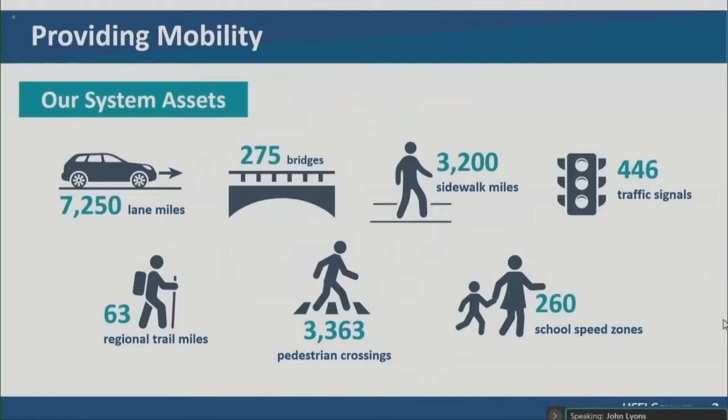The Public Works core service and mission is to provide a safe and reliable transportation system for pedestrians, bicyclists, transit, and vehicles. We operate this system 24/7. It supports not only the traveling public, but also responsive fire rescue and law enforcement for different reasons as well.

As Bonnie spoke to, in the next workshop we're going to speak to building and improving the system, which is the third component, the three-legged stool in our capital program. In preserving the system, we have a lot of assets, and it takes considerable effort and concentrated planning to execute and preserve the system. Today we're going to focus on that, and talk about the condition of our system as it is today and what could happen over the next 10 years with different investment options.

Asset preservation is the planned, scheduled maintenance of various parts of our network. This includes routine detailed inspection and condition assessment. This information is analyzed to develop a metric-based recommendation for repair and replacement.

Pavement is inspected on a 3-year cycle. The bridges are on a 2-year cycle, and sidewalks are inspected in response to citizen calls. The traffic signals are inspected by our operations people because they're routinely doing maintenance to ensure that they operate and function properly.

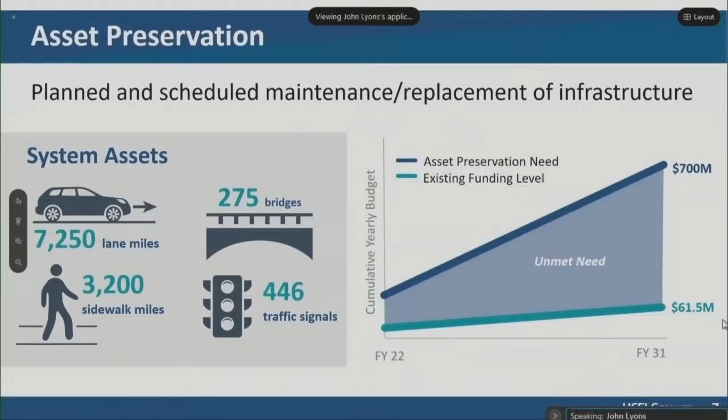Almost all the roads in the county are constructed of asphalt pavement, and they're categorized by major roads and local roads. These are some of the characteristics of each. Major roads are often multi-lane roads with multimodal connections, bus stops, and sidewalks. There's higher volumes on these roads, heavier types of traffic like trucks and buses, and many of the intersections are controlled by signals.

On the local roadways, those are typically 2-lane roads. They could be rural or neighborhood roads, with lower volumes and typically less heavy traffic, and they're typically stop-controlled through stop signs.

Each of the road segments are broken into segments, and we have about 27,000 segments that are inspected through that 3-year cycle. During that, the team measures things such as surface wear, rutting, and signs of distress such as cracking, patches, and potholes. That information is all plugged into a computer model that results in an overall pavement condition index.

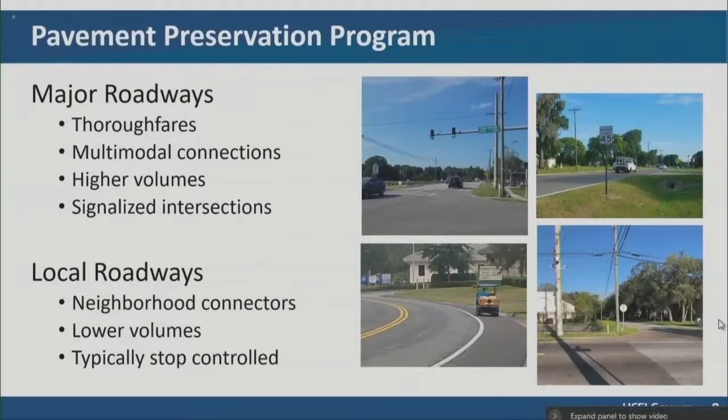About 2/3 of the roads are local roads, at 4,680 lane miles, and about 1/3 are major roads. The difference between a center line mile and a lane mile is we've broken it down into each travel lane. So as an example, a 4-lane road that's 1 mile long would have 4 lane miles.

We're setting targets of at least 50% of the roads should be in good condition, with less than 30% of the roads in poor condition. We'd like to get to a place where we have no roads in a failed condition. These outcomes will result in preserving the roadway assets, extending the useful life, and also improving the safety of the road.

The curve on the right is representative of a single segment of the road, and shows what happens to the roadway over time. Initially, when it's resurfaced or originally built, it stays in pretty good condition for a while. Then it starts to see the wear and tear of vehicles, the environment, and other factors. It goes into a fair to satisfactory category, but the slope starts to increase, meaning it's deteriorating faster. Then we get to poor to very poor, and then serious to failed. When it gets to serious to failed, major reconstruction typically takes place.

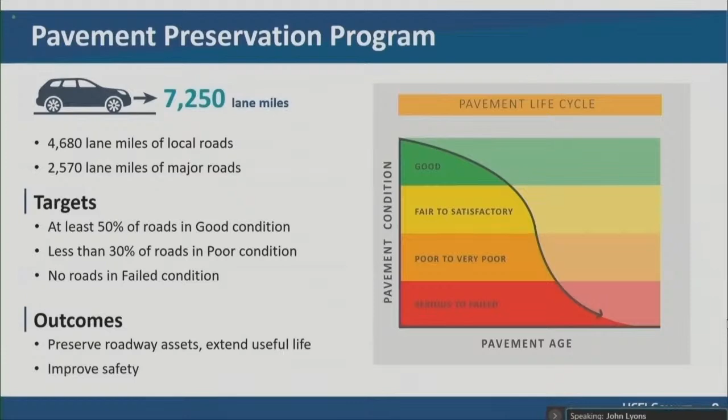These photos represent different conditions over time. The photo on the top left is a newly repaved road—the striping is fresh, everything looks good, and the asphalt is still dark. As you get to fair to satisfactory, the road has a few years on it, and the sunlight is starting to bleach some of the asphalt out of the roadway surface. You're starting to see wear of the surface, and the sand and gravel in there will start raveling away.

As you get to poor to very poor condition, you'll start to see cracks in the road. Those cracks are very important because they start to allow water to get into the base of the road, and that's when bad things start happening. So somewhere between fair and satisfactory, before we start seeing those cracks, is really when we want to provide that treatment to the road.

The photo on the right shows where the road has gone to serious to failed. The cracking has gone from linear type cracks to what we call alligator cracking. That's sometimes a reflection of the road base starting to fail where water has intruded upon it. It's also lost the structural integrity of the surface—the asphalt is flexing and starting to break down the structure underneath.

Through this inspection and analysis process, the appropriate treatment is selected to preserve and extend the useful life of the road.

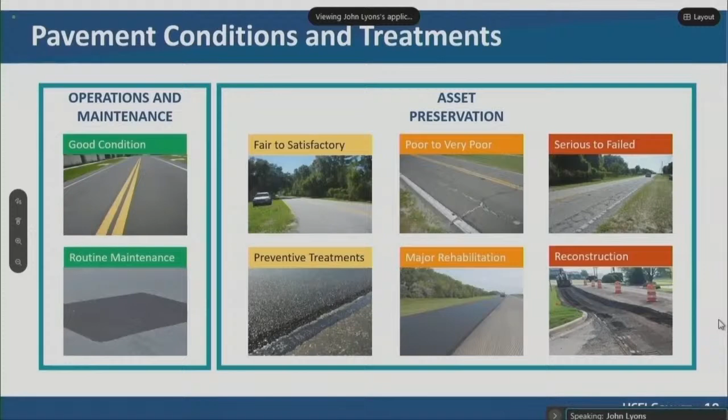Here's a recent example, just within the last couple of years, on Countryway Boulevard up in the northwest part of the county. It's 4.8 lane miles, just a little over 2.5 miles long. We ended up doing full depth reclamation, which is kind of a reconstruction treatment—the contractor brings in a mixer and mixes up the whole road base, recompacts it, typically adding asphalt or some other additive, then resurfaces over the top of it. The total cost of that project was about $1.8 million.

With the budget constraints we've had over the years due to the recession and other factors, we would have liked to have paved that road several years ago. If we had been able to do that, we could have milled the surface and overlaid it at about half the cost. So as you can see, the longer stuff goes, the further it deteriorates into that really bad condition, and the cost of fixing it goes up tremendously.

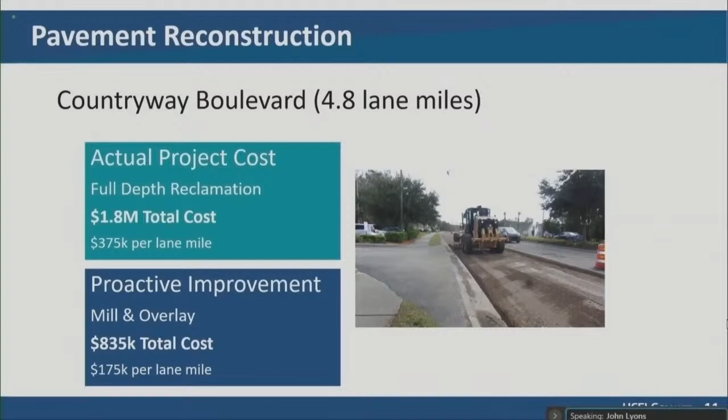We've seen a significant increase in the serious to failed roads, a very significant increase in the poor to very poor, and decreasing in the categories we desire to be in.

The ideal funding level is the catch-up proposal. To do that, we would spend about $25 million a year on local roads and be able to do about 240 lane miles per year. That brings a significant improvement into the system, to where 60% of the roadway is in good condition and only 24% would be in that poor to very poor. So we would really make a lot of progress on that as well.

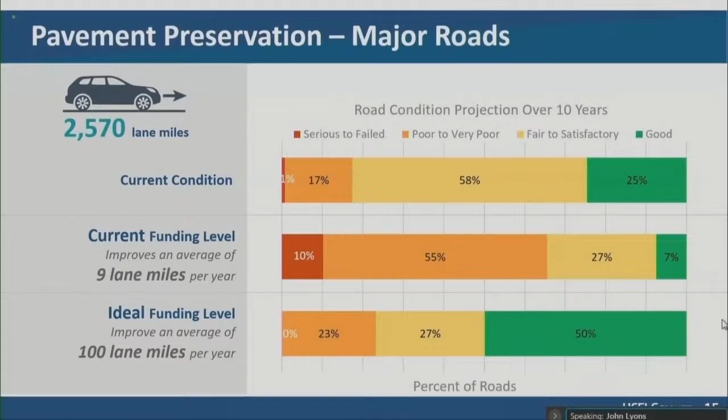So under the ideal level of funding at about $20 million a year, or $200 million over the 10-year period, these would be ideally what we'd be able to accomplish. With the current level of funding, significantly less effort would go into that.

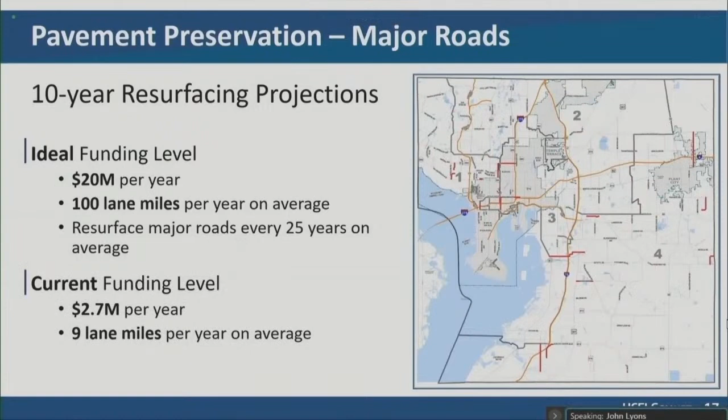The sidewalk repair program — we have 3,200 miles of sidewalk. What we really want to do is focus on improving the safety, health, and walkability of the community, and accessibility as well.

For about every mile of road, we have about 15% that has sidewalk issues, with either broken sidewalk or joints that have been offset and panels that need to be replaced. Typically these are isolated repairs of about 10 to 12 feet of sidewalk. With about 15% of that, there's about 60 to 70 locations per mile that need to be repaired. The good perspective is that if we fix that 15% of the sidewalk, it makes 100% of the sidewalk safe to traverse in that neighborhood.

We have about 2,400 open work requests right now actively waiting repairs, some dating back to 2011. We typically group those by neighborhood because it's more efficient. We don't want to do them individually from oldest to newest, because then we'd be moving all about the county to do that, and that's really inefficient — it would cost us a lot of money with the contractors to mobilize. So we typically look at the oldest request in a neighborhood, aggregate all the other requests, and that'll be the neighborhood that gets tackled first in those cases.

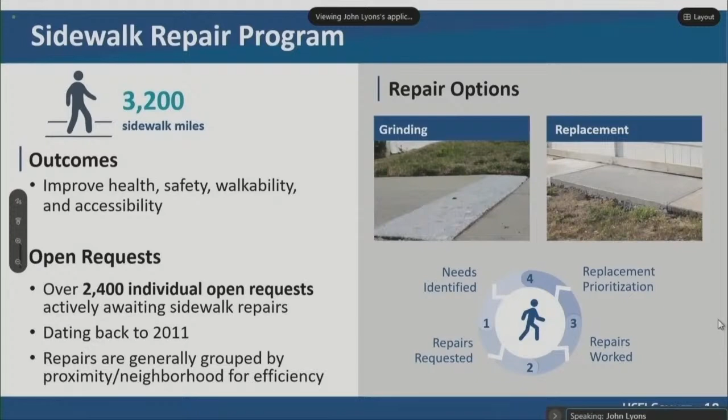Our 10-year sidewalk repair projection is that we would like to spend $10 million a year. We'd be able to knock out about 300 miles of estimated sidewalk replacement and take care of a lot of the neighborhoods around the county. At the current funding level, we're dropping back significantly and will be able to accomplish very little over the next 10 years.

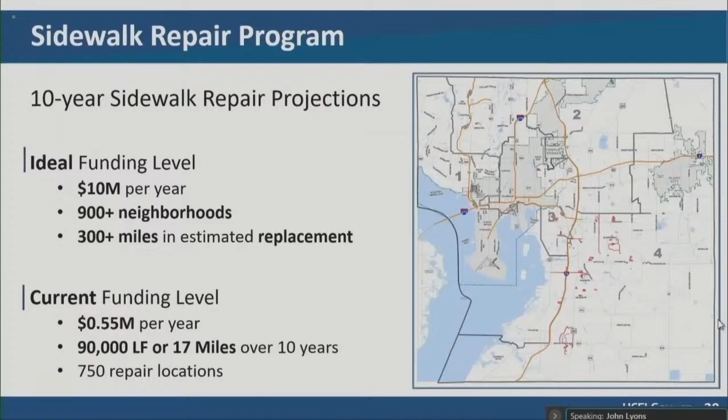The bridge program is another component of the system. We have 275 bridges in the system. 254 of those bridges are in the travel network for the roadways. The other 21 bridges are other types, potentially in parks, pedestrian bridges, the Upper Tampa Bay Trail, etc. We've consolidated and classified the bridges into essentially 4 types.

In the middle picture, the span bridge is typically a longer bridge. It has a piling foundation. It's over a waterway, typically a creek or a river or a bypass canal. It's a pretty substantial structure of longer length.

Another type of bridge that could be considered would be a culvert, a box culvert in this case. Under the National Bridge Inspection Program, anything over 20 feet in length, whether a combination of pipes or concrete boxes, or these spans, would be considered a system bridge that would be inspected. We have 75 of these culvert type crossings.

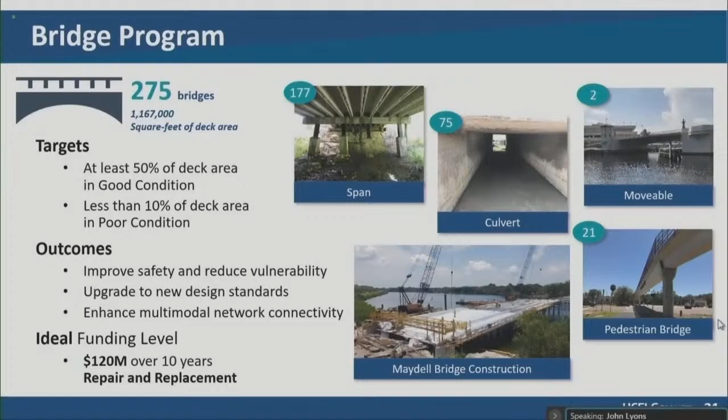The current condition of the system is actually in pretty decent shape. We've got 2% of the deck area in poor condition, which translates to more than one bridge—I'm not sure the exact number, but we can get that information.

At the current funding level, we'll see a significant increase of bridges moving from good to fair condition, and an increase in the level of poor bridges. At the ideal funding level, we'll have still less in good, but the entire system will either be in good or fair condition. One thing about bridges—we spoke of pavement life being 20 to 25 years, but typically these bridges are 50-plus year structures. So in this 10-year snapshot, we're expecting that in the next 10 years, years 11 through 20, we would probably need to invest more money in bridge replacements as those older structures need to be replaced.

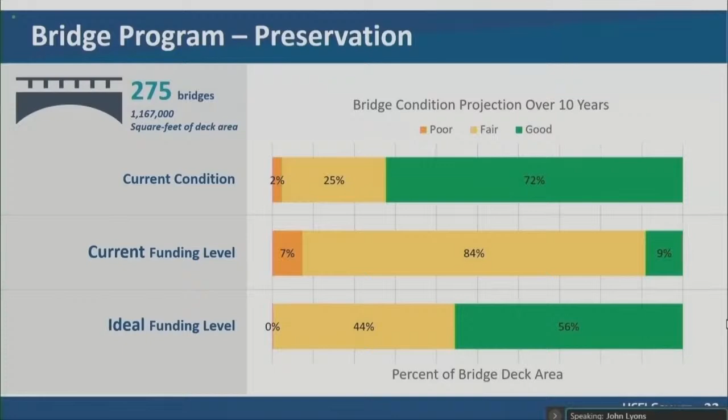Under the preservation portion of that $120 million, we would spend about $57 million over the next 10 years doing a lot of these type activities. The photo on the left shows the flow line of the bridge has been silted in. There's a possibility that with all that silting, the water flow goes elsewhere—it could be eroding the side banks or undermining the foundation in other areas. So we go in there and look for scour, which would undermine the foundation system of the bridge.

Go in and reinforce that, clean the sediment out, and do those types of activities. So there's a before and after picture there.

The cathodic pile jacket: this bridge was most likely in fresh, brackish, or salt water, and those piles are old. What happens is the water saturates the concrete and gets into the reinforcing steel. If it's salt water, it starts to erode the structural integrity of the bridge. So the fix in this case was to jacket the pile with additional concrete and reinforcing steel, and provide some cathodic protection against salt water. This extends the substructure of the bridge and lets it go for more years.

The picture on the right shows a wing wall, where it transitions from the roadway to the channel or water conveyance system, that was undermined and eroded. It has a tendency to separate and settle away from the bridge, which could cause other problems in the future. So those wing walls would be replaced.

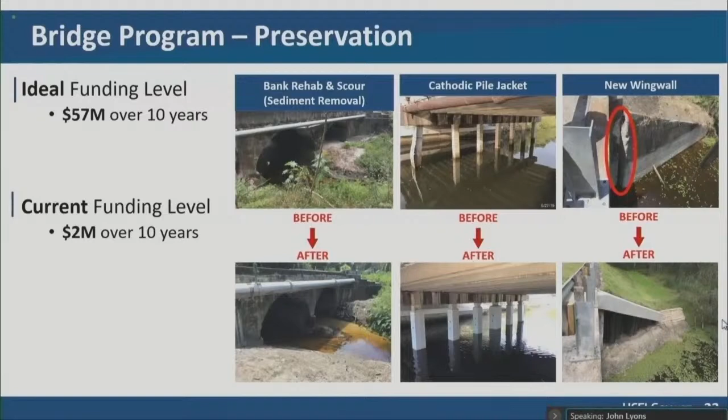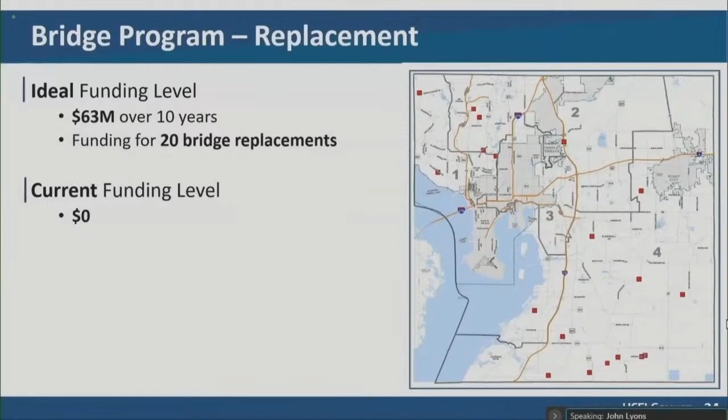Under replacements, we've identified about 20 bridges that need to be replaced over the next 10 years. At the ideal funding level, we would spend about 63 out of the 120 million on those replacements. At the current funding level, we wouldn't be able to do any of those bridge replacements.

For traffic signals and intersections, we're going to start a program that didn't exist before. We've done it on an occasional basis, but we need to start going in and methodically replacing signal poles in a lot of the intersections in the county. We have a goal, or target, of doing about 5 intersections per year.

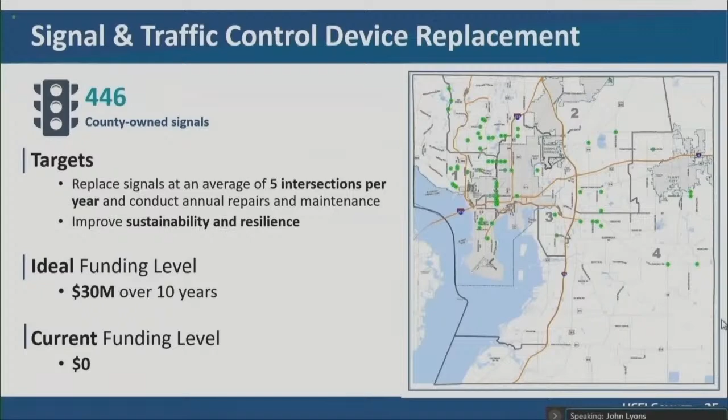The reason behind that is many of those poles are old. They were designed under different wind loading standards for hurricanes. Some of the structures, either the metal in the pole and mast arm is starting to crack, or the concrete is starting to crack away from the reinforcement on the concrete poles that have the wire across the intersections. This will improve our sustainability and resilience, and we'd hope to get about $30 million over the next 10 years.

So we're starting to summarize this now. This is what 10 years would look like under the ideal program: $250 million for local roads, $200 million for major roads, about $450 million over 10 years for resurfacing. Sidewalks would get $100 million, and this is just in repairs. The bridge repair program would be $120 million total, in the repair preservation category of 57, and 63 million toward bridge replacements, and about $30 million over... signal replacements.

If you overlay what our current funding level is for the next 10 years, the math changes on this slide a little bit, and you can see what's represented on those turquoise bars now would be the unmet need. That amounts to about $638 million over the next 10 years.

Looking at that on a cumulative basis is the same graphic we saw a little bit earlier. Current revenue sources are fuel taxes. We get about $6.1 million a year right now. Potential revenue options could be another transportation surtax, or the 5-cent local option fuel tax as well.

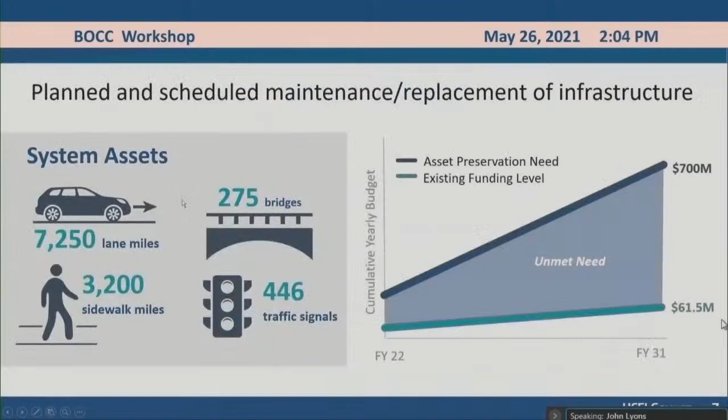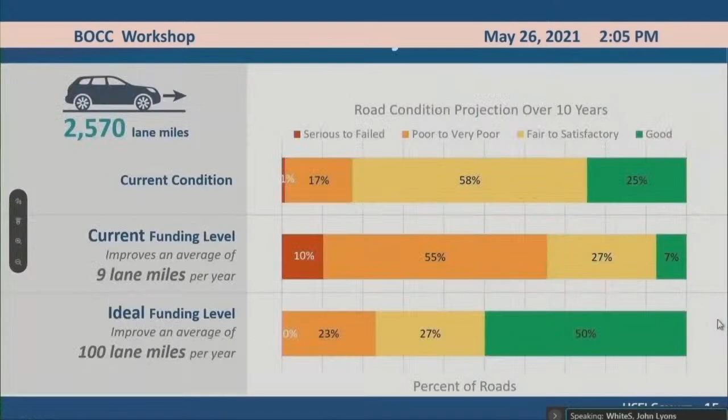Correct. Why is it that you get a lot more lane miles when you go to the 25 million? So it's that just in time. It's kind of the example of Countryway Boulevard. Okay. So under the scenario when you have very little money, we're going to attack those worst first, and they're going to be more expensive on a cost per unit basis. Perfect. That makes a lot of sense.

Well, now, I really don't have a lot of majors. Yeah, I really don't have a lot of commentary at this point, but I think this certainly gives the board something to chew on, though, as we discuss the upcoming budget and, frankly, as we look ahead to conversations about a potential 2022 referendum. So, thank you, John, for a very informative presentation.

I learned a lot. You're welcome. Commissioner Overman, you recognized? Thank you. And I'll echo Commissioner White's. That was an excellent presentation, cleared up a lot of questions I had about how we go about projecting funding needs.